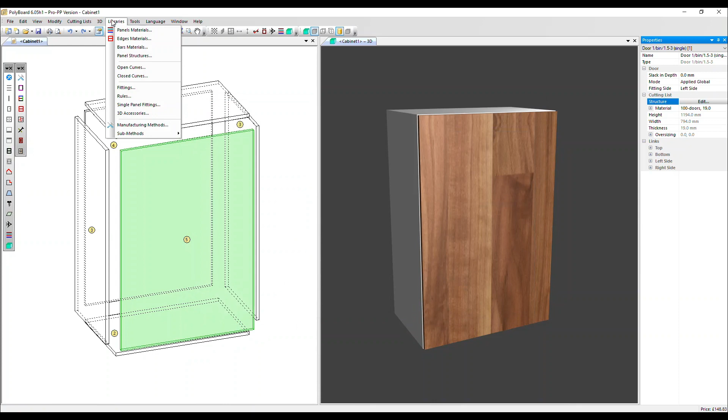So this is a closed polyline. If we click here in the shape and down at the bottom you've got a library option. This gets us into our closed curves library. You can also get there by going to the top menu, libraries, closed curves, and you can add extra designs here by clicking the plus button and importing a DXF file. Let's cancel that, go back into structure edit, inner tooling.

So we've got a circle selected. I'm going to change that to a heart. You can turn it around. It's symmetrical left to right, so it's not going to have any impact in this case, but you can do that if you wish with our other designs, and we can scale it. You can change the height if you want, which will change the width because they're linked proportionally. Let's just use this scale option here and put it at 200%.

The orientation will rotate the shape. Let's put that at 20°. Okay, and then you've got position options. You have first of all a tooling reference, which is set to center. Here this square references that point, the exact center of the tooling. You've also got a panel reference, which is set at center as well. Let's change that to top right. So you see a red square appear here, which is the panel reference.

We've got X and Y positions. These coordinates tell you exactly where the tooling is in relation to the panel reference. So because they're below and to the left, you've got minus figures. You can actually also drag the tooling if you want, but let's position it exactly 50mm from that top right corner. Put in -50 and same again.

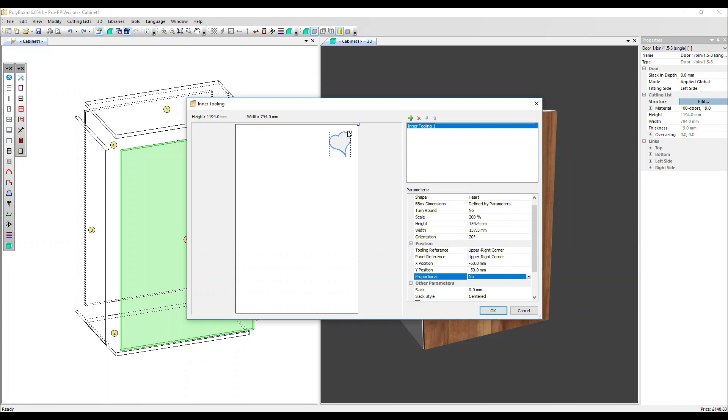So that doesn't look too good. That's because my tooling reference is still set on center. The center of the tooling is 50mm from the edge, from that corner in fact. So let's change the tooling reference to top right of the tooling, and now go back to -50 and -50. So now we've got exactly where we want it. Let's click OK to apply it, and you can see the inner tooling here on the door.

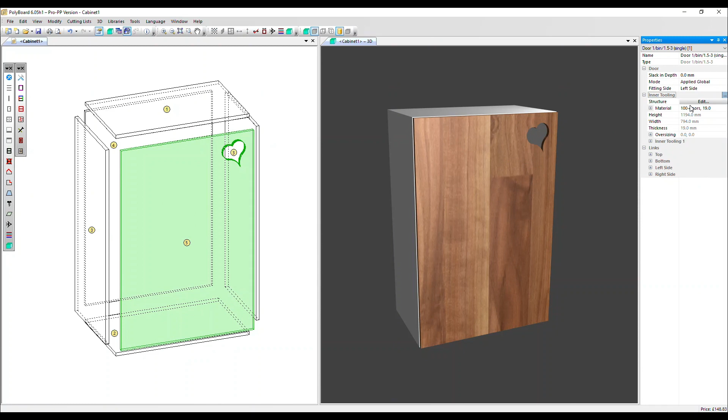I'm going to select that door again and go now to inner tooling option and this button with 3 dots on it. That edits the tooling we've already created. Click there and then edit, and we're back in. So we've got some other parameters here as well. Some of these relate to specific CNC machining setup, so we're not going to go into them now.

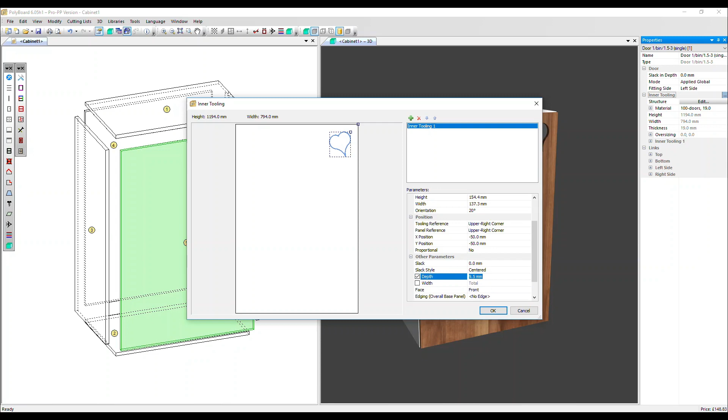Just to show you though a couple of things, we've got an edging option, so we could apply edging to the outside of that tooling if we want, and we can also apply a depth. At the moment the shape has been cut straight through the panel. If we click here next to depth, it's defaulted to halfway through, 9.5mm. Let's click OK. And if I zoom in on the 3D, we can see we've created a cutout there. I'm going to undo that and show you one more option.

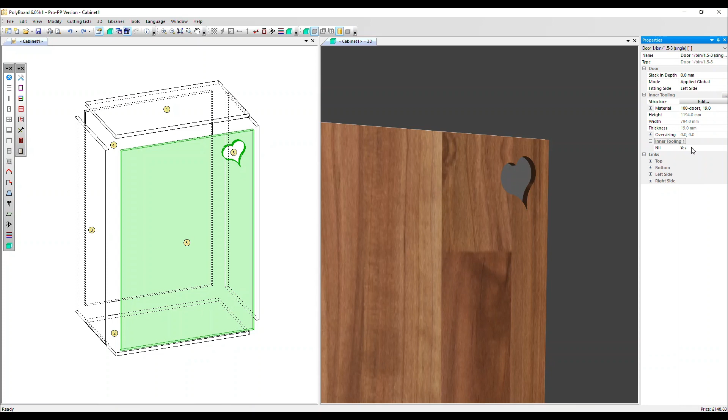Let's go back into the inner tooling. So we have in the properties menu inner tooling 1 that's been created. This allows us to change the tooling from a nil panel, which means it's just a cut through, doesn't exist. Let's change that to no. Now we can select a material. It's defaulted to the door material.

Can't see it that well, so let's just change it to this generic 19mm, same thickness as the door, but a different material. It doesn't have a texture applied, it's just white, but you can see clearly that this is a way to create very quickly an inlay using the inner tooling feature.